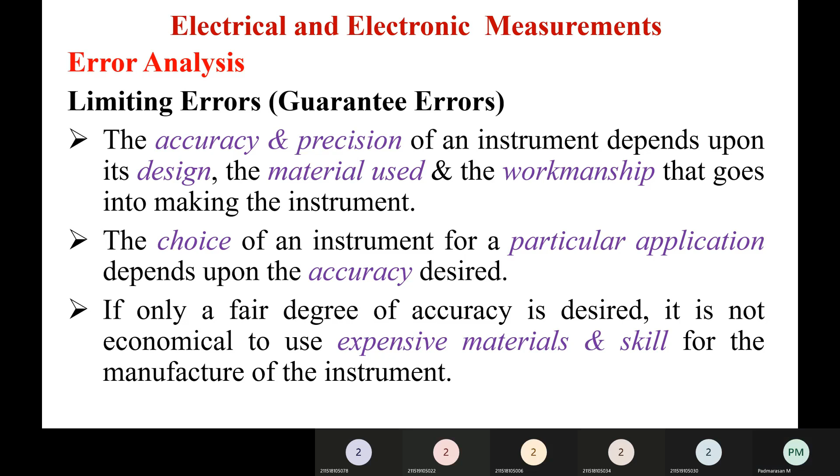Similarly, if only a fair degree of accuracy is desired, it is not economical to use the expensive materials and the skill for the manufacture of the instrument. But an instrument used for an application requiring a high degree of accuracy has to use the expensive material and a high skilled workmanship.

So the economical production for any instrument requires the proper choice of material, design, and skill. So these three things are required for economical production of any instrument. In order to assure the purchaser of the quality of the instrument, the manufacturer guarantees a certain accuracy. In most of the instruments, the accuracy is guaranteed to be within a certain percentage of full-scale reading.

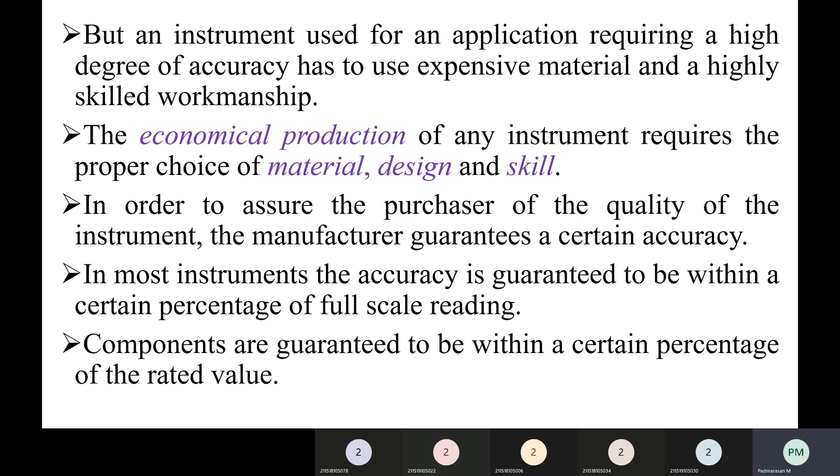So the components are generally guaranteed to be within a certain percentage of the rated value. So in most of the instruments, the accuracy is guaranteed to be within a certain percentage of the full-scale reading. Generally, the manufacturer has to specify the deviations from the nominal value of the particular quantity. The limits of these deviations from the specified value are defined as the limiting errors or guarantee errors.

The limits of this deviation from the specified value are defined as the limiting errors or the guarantee errors. The manufacturer guarantees or promises that the error in the item he is selling is no greater than the limit set. The magnitude of a quantity having a nominal value As. So A suffix s is nothing but nominal value, and the maximum error or the limiting error of plus or

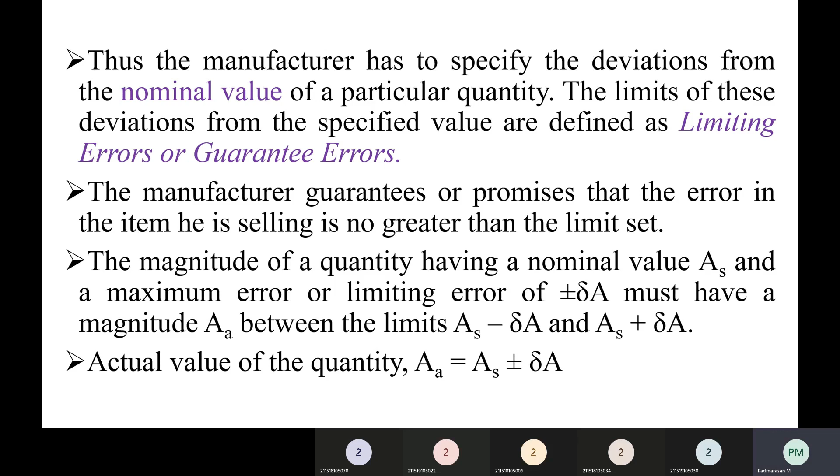minus δA. And it has a magnitude Aa between the limits As minus δA and As plus δA. These two are the limits As minus δA and As plus δA. So the actual value of the quantity can be calculated as Aa equal to As plus or minus δA. So for example, the nominal magnitude of a resistor. So consider a resistor which is 100 ohm and the limiting error is plus or minus 10 ohm.

Limiting error is plus or minus 10 ohm. The magnitude of the resistance will be between the limits. That is Aa equal to 100 plus or minus 10 ohm. So now Aa becomes greater than or equal to 90 ohm and Aa is less than or equal to 110 ohm. That is 100 plus 10 which is equal to 110. So Aa is less than or equal to 110 ohm. Similarly, 100 minus 10 equal to 90 ohm. So Aa is greater than or equal to 90 ohm. The manufacturer guarantees that the value of resistance of the resistor lies between 90 ohm and 110 ohm.

Next, we will see the next term in this error analysis, that is relative limiting error or fractional limiting error. So the relative error or relative fractional error can be defined as the ratio of the error to the specified nominal magnitude of a quantity. So the expression is relative limiting error εr equal to δA divided by As, which is equal to ε0 divided by As. So ε0 equal to δA, which is equal to εr into As. So εr is nothing but a relative limiting error.

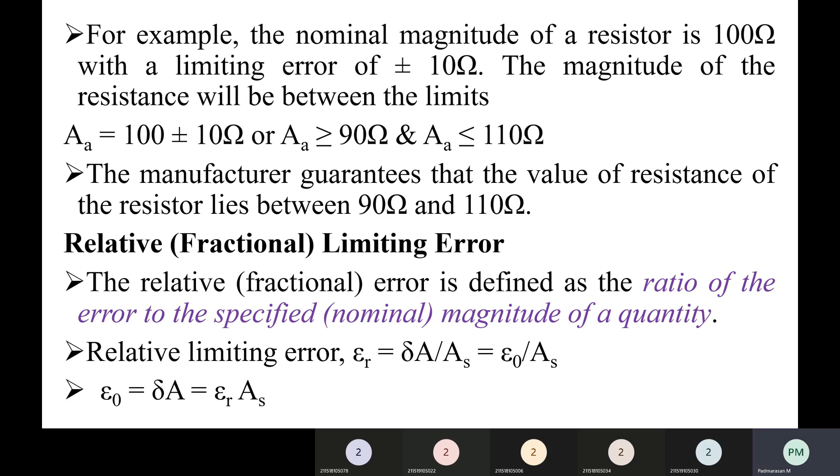Next we will see types of errors. So errors can be classified depending upon the different sources they arise from. So no measurement can be made with perfect accuracy, but it is important to find out what accuracy actually is and how different errors have entered into the measurement. So a study of errors is a first step in finding ways to reduce them. So errors may arise from different sources, which are usually classified into three, that is gross errors, systematic errors, and random errors. Now let us discuss these three errors one by one.

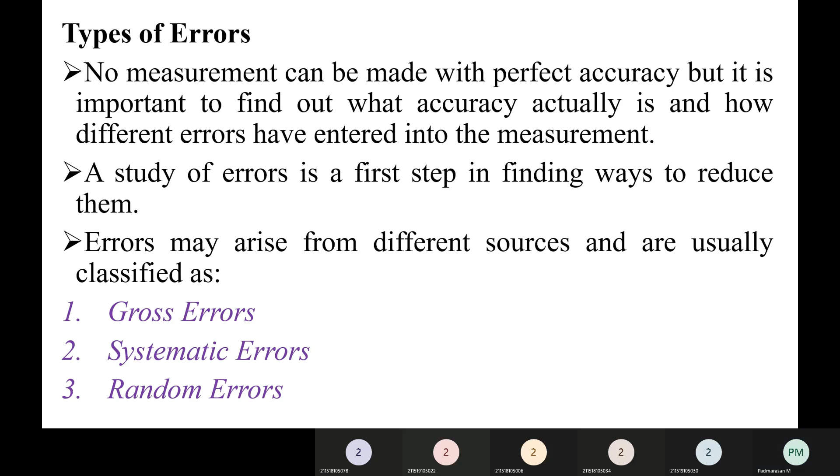First one is gross errors. These gross errors mainly cover human mistakes in reading instruments. While taking the reading in the instrument, generally humans make some mistakes. So these mistakes come under gross errors. And also recording and calculating measurement results.

So by recording the various parameters or by calculating the various parameters, the errors come in. So these errors come under gross errors. So the responsibility of the mistake normally lies with the experimenter. The experimenter may grossly misread the scale. So while taking the reading, suppose the experimenter misreads the readings, then this type of error

occurs. So for example, a person due to an oversight may read the temperature as 31.5 degrees C, while the actual reading may be 21.5 degrees C. That is, the actual reading is 21.5 degrees C, but due to oversight, the person reads the temperature as 31.5 degrees C. So this error is the gross error.

And suppose a person transposes the reading while recording. For example, he may read 25.8 degrees C and record 28.5 degrees C instead. So instead of 28.5 degrees C, he read or measured 25.8 degrees C. So this is the error. It is called gross error.

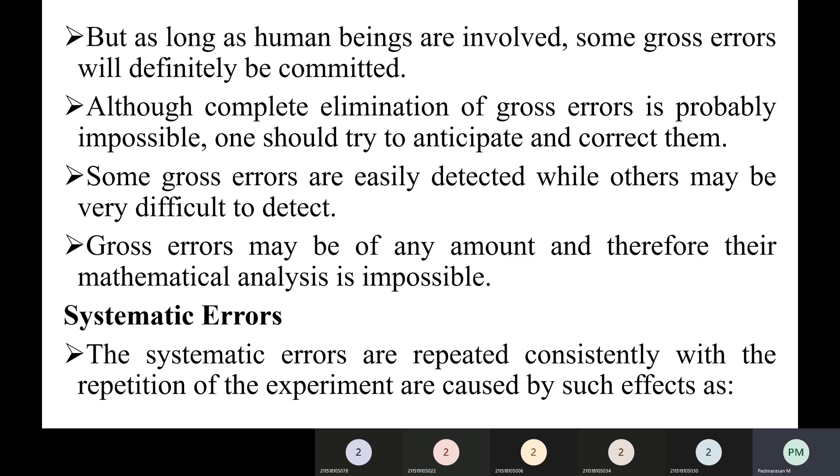So far we have discussed what is meant by gross error with some examples. Next we will see the next type of error, that is systematic error. Systematic errors are repeated consistently with the repetition of the experiment, and are caused by effects such as sensitivity shift, zero offset, and non-linearity.

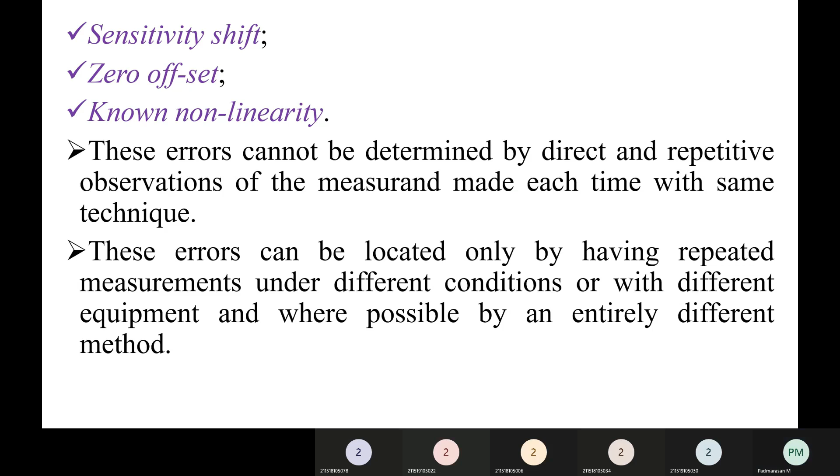So these errors cannot be determined by direct and repetitive observations of the measurand made each time with the same technique. These errors can be located only by having repeated measurements under different conditions or with different equipment and, where possible, by an entirely different method. So generally these errors, that is the systematic errors, cannot be determined by direct and repetitive observations of the measurand made each time with the same technique.

Next, we will see the types or classification of systematic errors. Systematic errors can be classified into three types. First one is instrumental errors, second one is environmental errors, and the third one is observational errors. First we will discuss instrumental errors. These instrumental errors arise due to inherent shortcomings of the instruments, second, misuse of the instruments, and third, loading effects of instruments. So these errors arise due to inherent shortcomings in instruments, misuse of the instruments, and loading effects of instruments.

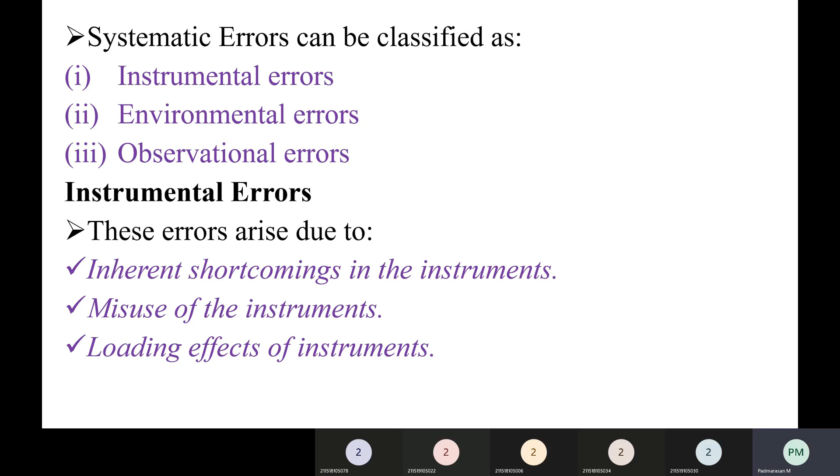So instrument errors are inherent in instruments due to construction, calibration, or operation of the instruments. These errors may cause the instruments to read too low or too high. Some examples of these errors are mechanical friction and wear, backlash, yielding of supports, pen or pointer drag, and hysteresis of elastic members due to aging.

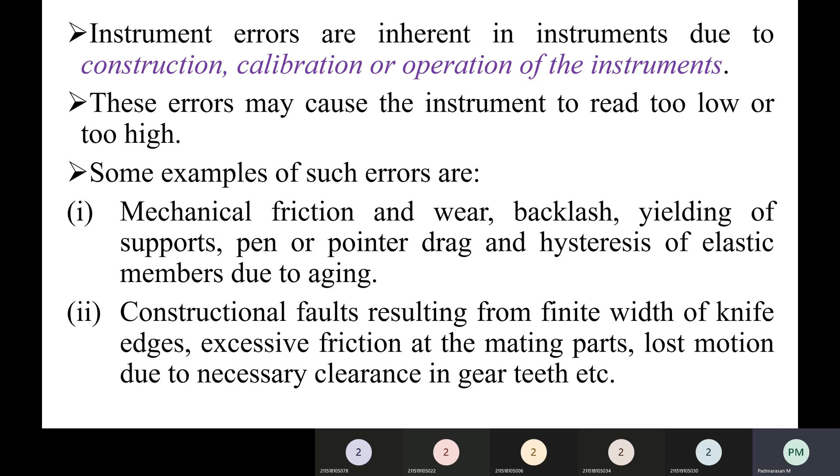These are some examples. The next example is constructional faults resulting from finite width of knife edges, excessive friction at the mating part, lost motion due to necessary clearance in the gear teeth, etc. So these are some examples of instrument errors. Second, improper selection and poor maintenance of the instrument. If you select the instrument improperly, or if the maintenance of the instrument is poor, then this error occurs. And the next one is unavoidable physical phenomena due to friction, capillary attraction, and imperfect rarefaction. So these are the various reasons.

Next one is assembly errors. These errors arise due to some reasons. What are the reasons? First one is displaced scale, that is, incorrect fitting of the scale zero with respect to the actual zero position of the movement. Second one is non-uniform division of the scale. Suppose there is a non-uniform division present in the scale of the instrument, then this assembly error occurs. Third one is bent or distorted pointer.

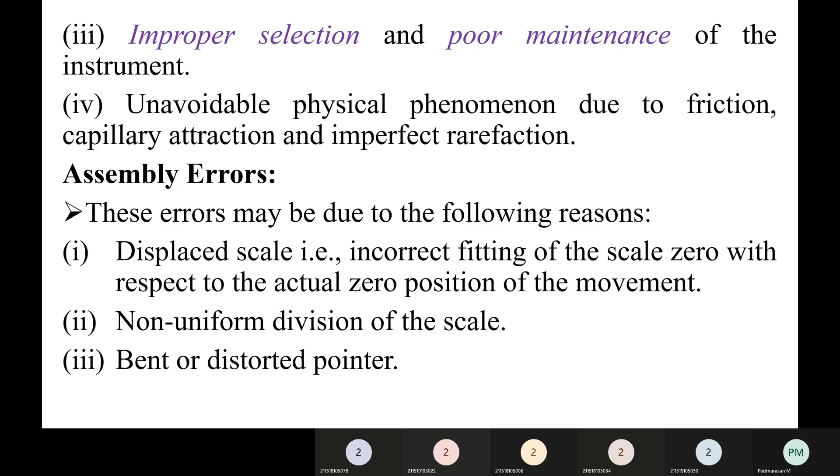And next, the assembly errors do not change with time, so they can be easily discovered and rectified. Next, we will see the misuse of instruments. A good instrument used in an unintelligent way may give erroneous results. So if any person uses a good or perfect instrument in an unintelligent or different way, then it will give erroneous results.

Next, we will see loading effects. Loading effects means that in several measurement techniques, the detector or sensor utilizes the energy of the medium, thus altering slightly the parameter to be measured, resulting in errors.

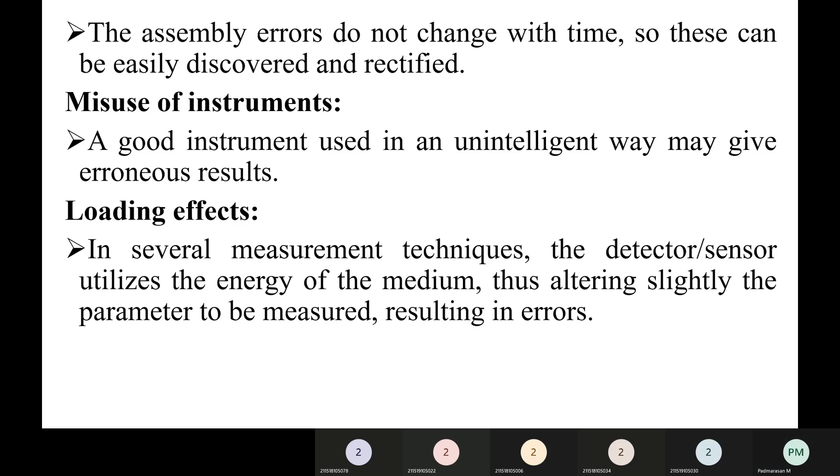Next, we will see the next type of error, that is environmental error. Environmental errors are due to the conditions external to the measuring device, for example, effects of pressure, temperature, humidity, dust, vibrations, external magnetic or electrostatic fields. Actually, these errors are much more troublesome than the assembly errors. These errors can be completely eliminated or reduced by taking some measures. That is, using the instrument in controlled conditions of pressure, temperature, humidity in which it was originally assembled and calibrated.

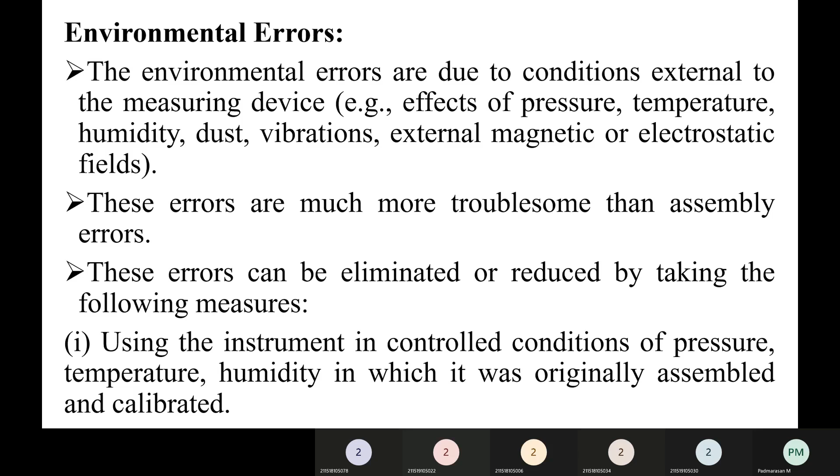Second, measure deviations in the local conditions from the calibrated ones, and then apply suitable corrections to the instrument readings. Third, automatic compensation for departures from the calibrated conditions by using sophisticated devices. So by using sophisticated devices, automatic compensation for departures from the calibrated conditions can be done. Next, make a complete new calibration under the local conditions.

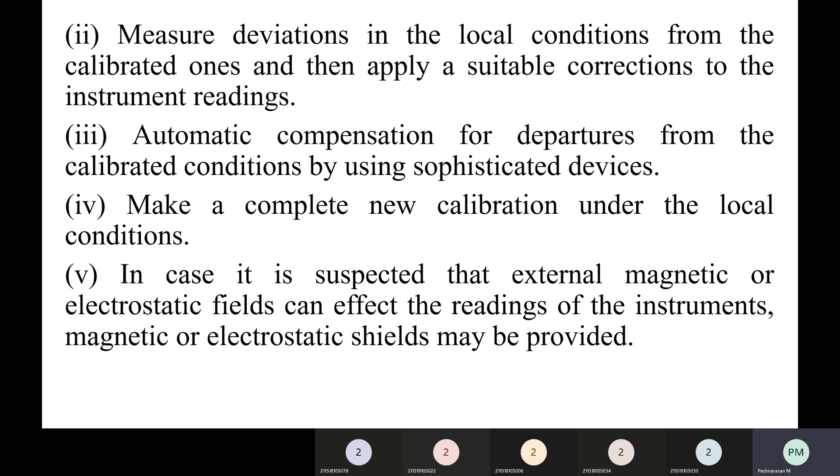Next, in case it is suspected that external magnetic or electrostatic fields can affect the readings of the instruments, magnetic or electrostatic shields may be provided. Next, apply computed corrections. Normally, efforts are made to avoid the use of computed corrections, but where these corrections are necessary, they are incorporated for the computation of the results.

Next error is observational errors. These observational errors occur due to the carelessness of operators. Due to the carelessness of the operator or a person using the instrument, this type of error may occur. Even when an instrument has been properly selected, carefully installed and faithfully calibrated, shortcomings occur due to certain failings on the part of the observer. So the observational errors may be due to some reasons.

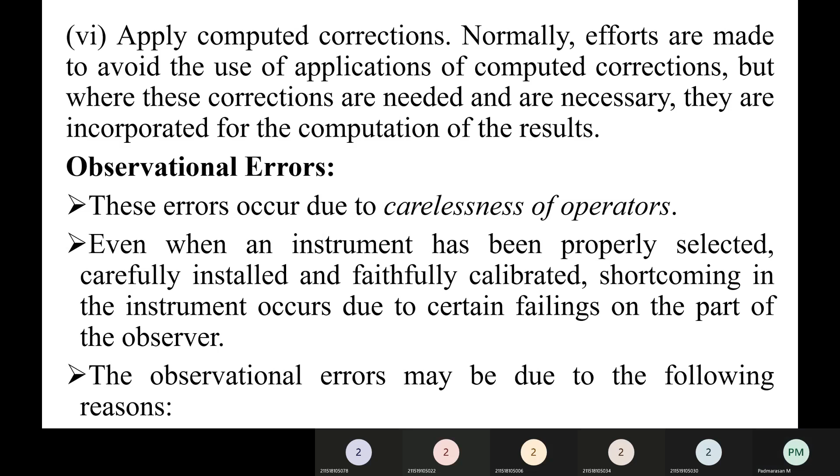First one is parallax error. Since parallax errors arise on account of the pointer and the scale not being in the same plane, we can eliminate this error by having the pointer and the scale in the same plane. Next, wrong scale reading and wrong recording of data. If a person records the data in a wrong way or takes a wrong scale reading, this type of error occurs. Next, inaccurate estimates of average reading, and lack of ability to interpolate properly between graduations.

Next one, incorrect conversion of units in between consecutive readings and non-simultaneous observation of interdependent quantities. A person doing the conversion...